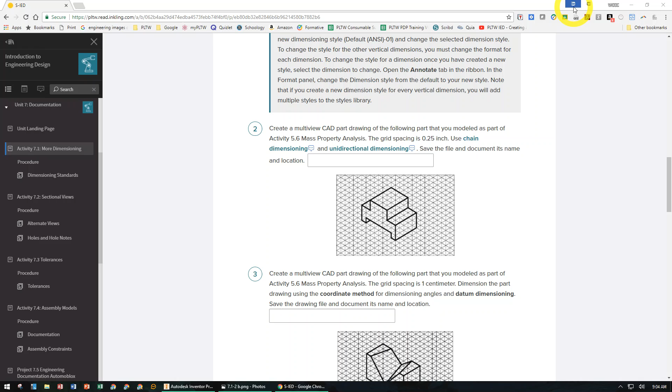This is IED activity 7.1, more dimensioning, problem number 2. The My PLTW website asks us to draw this drawing, so let's get started. We want to start with a new 2D sketch for a new part file.

We want to put our origin down here in the lower left corner so that we have plenty of space to work. Looking at our drawing that they gave us, it's a pretty simple drawing to do. It's one extrusion, so it can go pretty quickly. The overall width of the object is 1 square plus 6 squares plus another 1 square. That's a total of 8 squares or 2 inches.

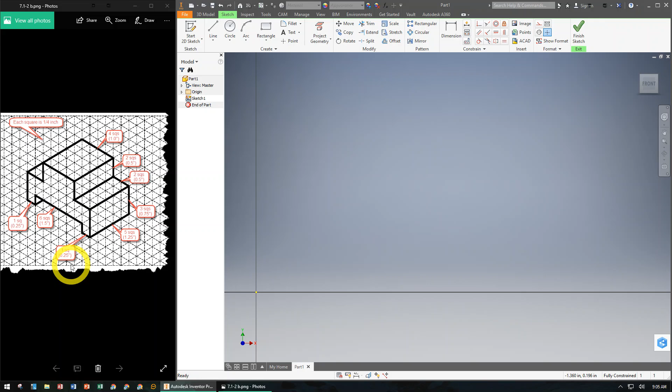The overall height is 3 squares plus these 2 squares here, so that's 5, which is 1.25 inches. And let's see, its whole overall depth is 5 squares, so that's 1.25 inches. So we can start by making a simple line drawing. It's best if we do this trying to keep our constraints in place.

So start here at the origin. When the cursor is at the origin and it turns green, that means it's snapped in place. So we want to click and start there. I'm going to go across the bottom, trying to remain parallel or horizontal in this case. So our perpendicular constraints will kick in for 0.25 inches. I'll type that in and hit enter.

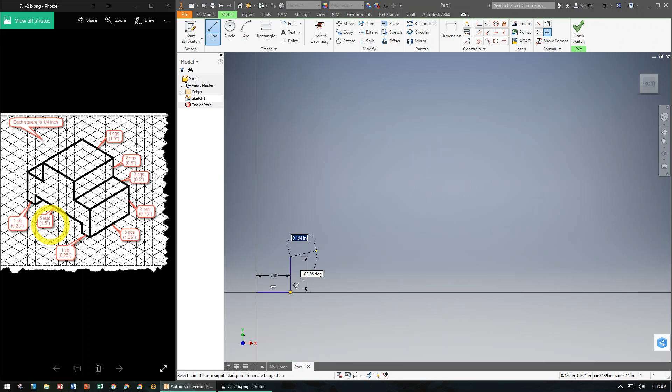I need to come up. The height of that opening is 1 square, which is 0.25. I'm at 90 degrees, so a perpendicular constraint will kick in. The lower portion of this notch across here is 6 squares, which is 1.5 inches, so I'll come over to the right 1.5. Again, staying at 90 degrees, so my perpendicular constraint will occur.

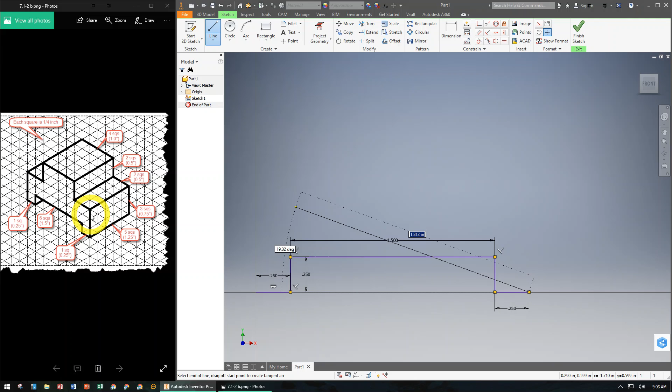I will come down. So it snaps to the line at 90 degrees, which is 0.25 inches. And again, come over to the right, 0.25, and make sure I'm perpendicular to that original line. So we're in place. Then we're going to come up this line right here, which is 3 squares or 0.75. Make sure again it's at 90 degrees, so we get our perpendicular constraint kick in. You can see it right there.

We're going to come back on this line right here. It's 2 squares, which is 0.5 inches. Then we go up on this line right here. We go up 0.5 or 2 squares. This line across, we have a dimension back here. It's 4 squares or 1 inch.

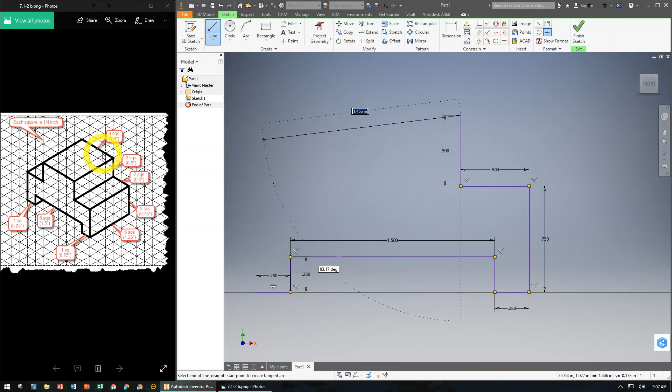And basically we're coming down and just matching things up. So as you come down here, you'll notice that a line pops in when I get down even with the other line on the other side. It also says it's 90 degrees. So I can click there, come across. Now I don't have anything to base this upon, but I know back here this is 2 squares, which is 0.5 inches, making sure that I am perpendicular at 90 degrees. It actually comes back to the axis line, and then bring it down. I want to close out the loop.

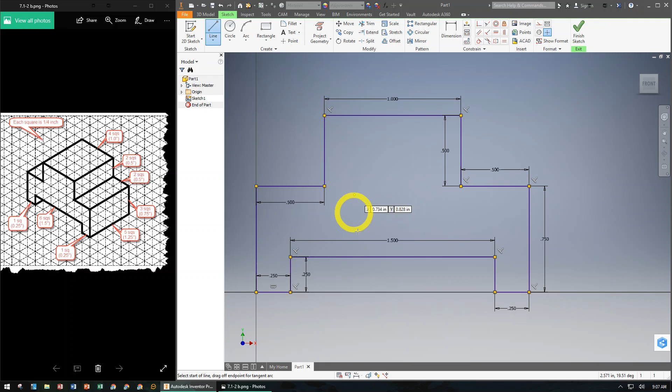If you notice, every intersection all the way around has a yellow dot, which means they are constrained at those points. They're coincident constraints. The green dot here closes the loop out, so it's a continuous loop. That's all I need for this sketch. I can hit Finish Sketch up here, click on my Home View button, and the only thing I have left to do is to extrude this object.

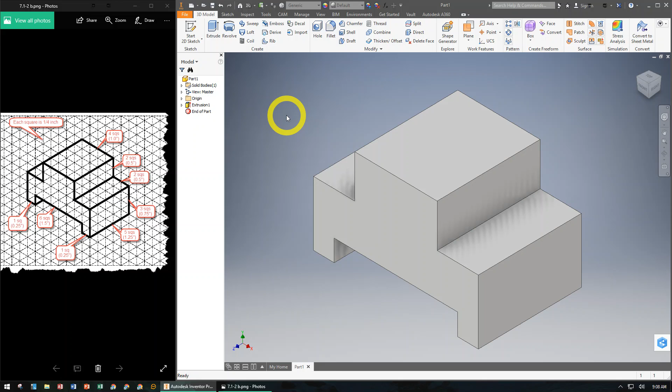And my extrusion, it doesn't matter which way I go, but remember we're going to extrude it back 5 squares, which is 1.25 inches. And I'll click my green checkbox and my home view, and that is all there is to make that simple drawing. So make sure you save that part file, because you'll be using it in a drawing file in a little bit.